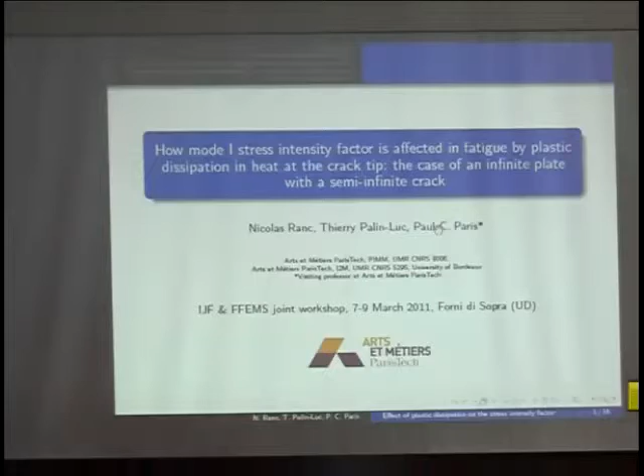The title of the talk is how the mode 1 stress intensity factor is affected by plastic dissipation in heat at the crack tip. We will focus on one very theoretical case of an infinite plate with a semi-infinite crack. I will explain why, but shortly speaking, it's because it's the only case where we can obtain an analytical solution of the problem. This is work done with my colleagues Nicolas Ranc and Paul Paris, who was invited by my university last year and the year before.

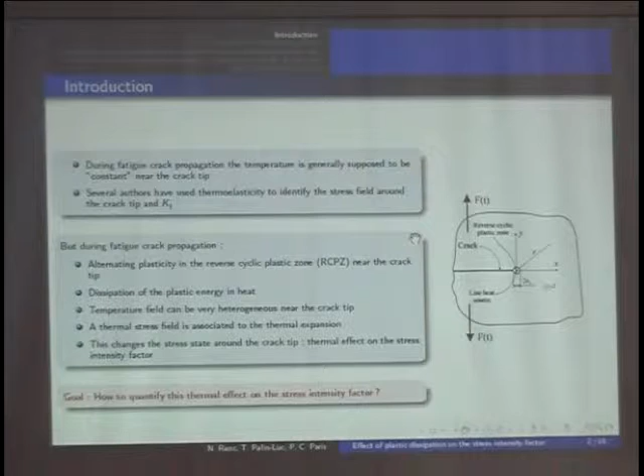So what is the motivation of the work? Many people use thermoelasticity to estimate the stress field around the crack and to compute the stress intensity factor, often considering the temperature around the crack tip constant. But in fact, if there is crack propagation, during that propagation there is alternating plasticity in the reverse cyclic plastic zone, meaning that a significant part of this plasticity, the strain energy, is dissipated as heat around the crack tip.

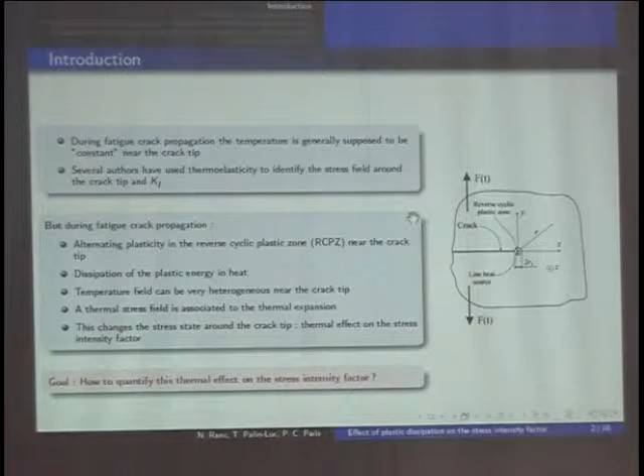Due to this dissipation in heat, the temperature field around the crack tip is heterogeneous, and consequently there is a thermal stress field associated with thermal expansion, because around the crack tip the material tries to expand but cannot, due to the rest of the material being elastic. So how to quantify this effect on the temperature and on the stress intensity factor is the main goal of the presentation, in the theoretical case of a large plate with a large crack.

So the plan of my presentation after this brief introduction: first we will see the thermomechanical problem and several assumptions to solve it. Then we will see the resolution of the thermal problem - the first important point is to be able to compute the temperature field around the crack tip. The second important point is to solve the mechanical problem, to compute the stress field and then the stress intensity factor due to thermal stresses. Finally, we will see the conclusion and interesting prospects for future work.

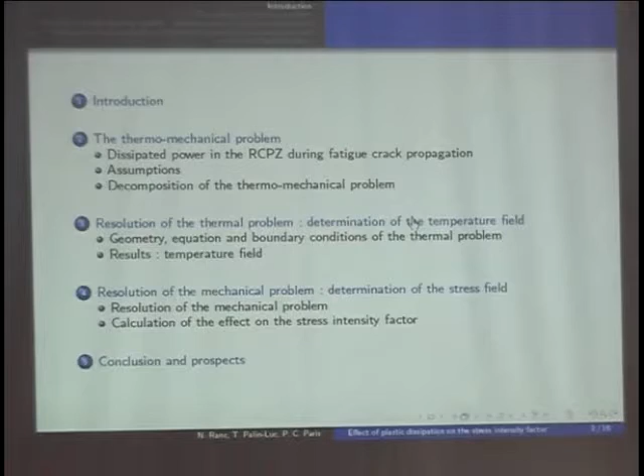In literature, many people have focused on the dissipation in heat of plasticity for very fast cracks, for instance during impact loading or quasi-static loading, but only a few papers, according to me and my colleagues, are focused on what happens under cyclic loading.

For instance, my colleague Nicolas Ranc proposed in 2008, based on experiments, that the dissipated power per unit length of the crack front is proportional to the radius of the reverse cyclic plastic zone to the power 2, and also proportional to the loading frequency. I will come back to this at the end in the prospects, but the proportionality with the loading frequency is interesting for future work, I think.

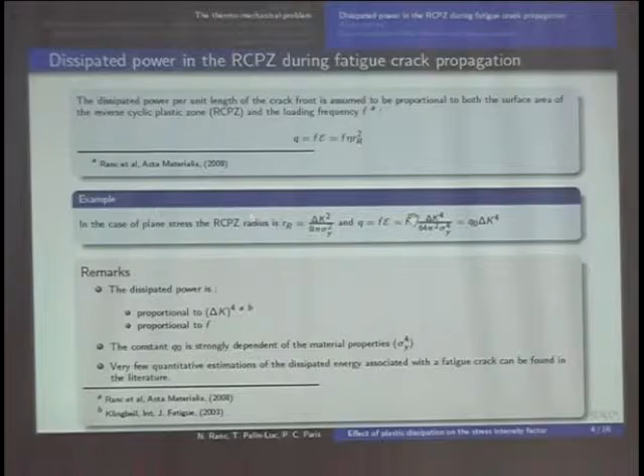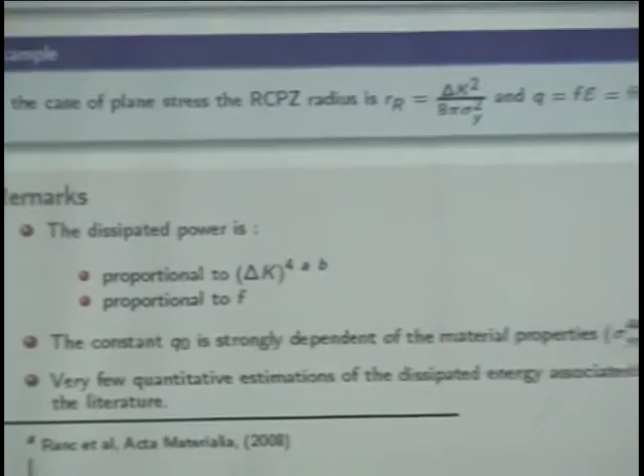So, for instance, if you are in plane stress - but it's the same in plane strain conditions - you can compute the reverse cyclic plastic zone with a very simple approximation, and in this case you can see that the heat source, or the flux of temperature, is proportional to delta K to the power 4. It's important to note these two proportionalities, and also that Q0, this factor, is strongly dependent on material properties, because the yield stress appears here with the power 4.

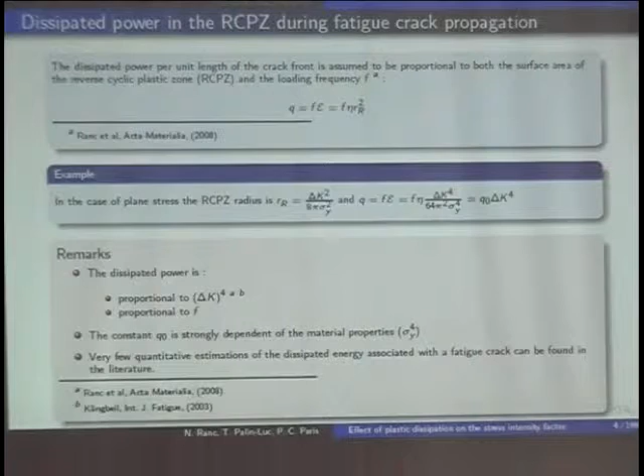But in literature, there are only a few quantitative estimations of this dissipated energy - we will come back to this at the end of the presentation. Anyway, it's clear that there is dissipated energy, and now we will focus on how to estimate its effect on the stress field and on the stress intensity factor.

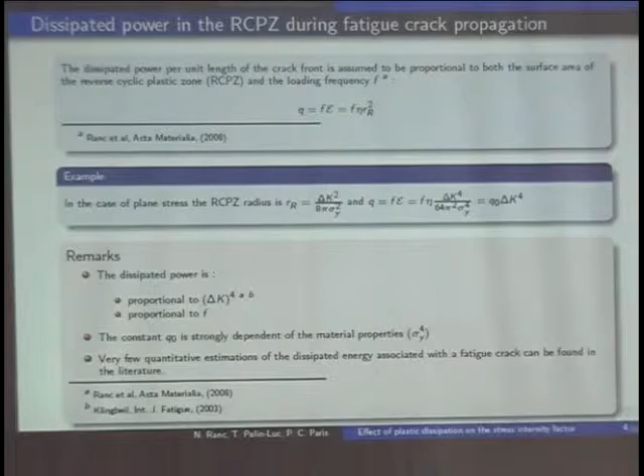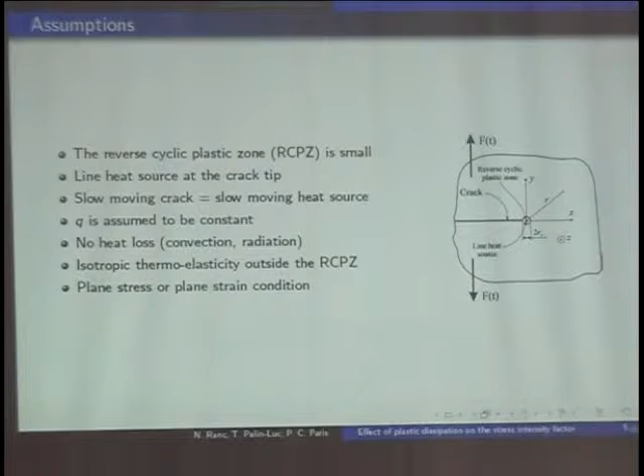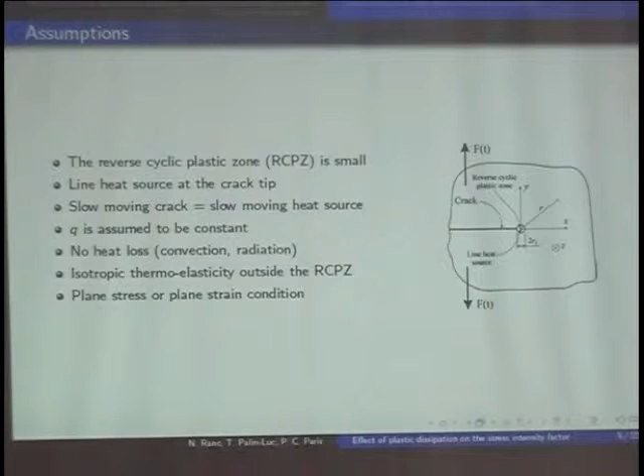So the assumption of the presentation, to be able to solve the problem analytically, is the following: we consider that the reverse cyclic plastic zone is small compared to the size of the specimen, and in this case the reverse cyclic plastic zone can be modeled by a line heat source - a local heat source. In this case, an analytical solution exists, and we will see it's not very difficult.

And we consider that the crack is moving very slowly, because in the case of the thermomechanical problem, there is a competition between the speed of the crack and the speed of the heat conduction.

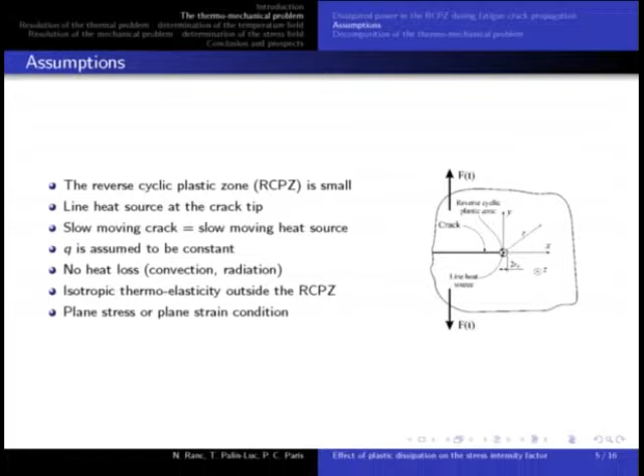So the problem we have to solve with the cyclic loading for the crack propagation is the following. There is a mechanical problem, the usual problem that all of you know, plus the thermal problem with the heat source at the crack tip, which creates a thermal stress field and which will affect the stress intensity factor. I will call in the presentation K-temp, the temperature effect on the stress intensity factor.

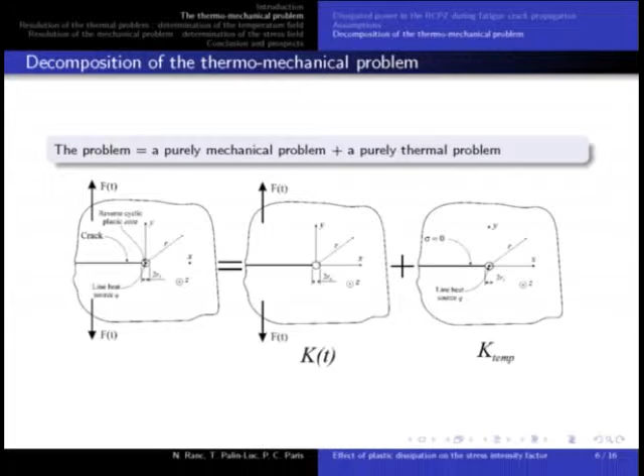What are the boundary conditions? And the first important point, the assumption in order to be able to compute the temperature variation field around the crack tip: from a thermal point of view, the problem is axisymmetric, and the heat source is considered as static or motionless. And we will see that in the equation, the temperature field and the stress intensity factor due to temperature is proportional to the heat source.

So we have solved all the computation with a unit heat flux. But we will see the effect at the end if we consider another value. We consider the transient regime. It means that when the crack starts to propagate, what happens and how the heating appears.

And for the temperature effect, in first approximation, we consider that the crack does not affect the temperature field. This is maybe a strong approximation, but for future work in finite element analysis, we can take into account the effect of the crack on the temperature field.

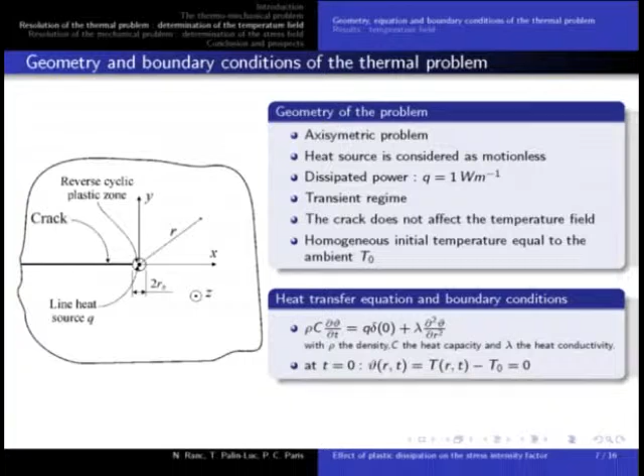So if we write the heat transfer equation, we have this equation with the local heat source, with the Dirac function here. And we are looking for the temperature variation field with a first homogeneous temperature T0.

What are the results? The results are the following. On the left, you have here, from the crack tip, so the crack is here, the effect of the temperature - I'm sorry for the scale, which is in small letters. Here you have 0.03 degrees Kelvin versus the radius. So here there is the specimen.

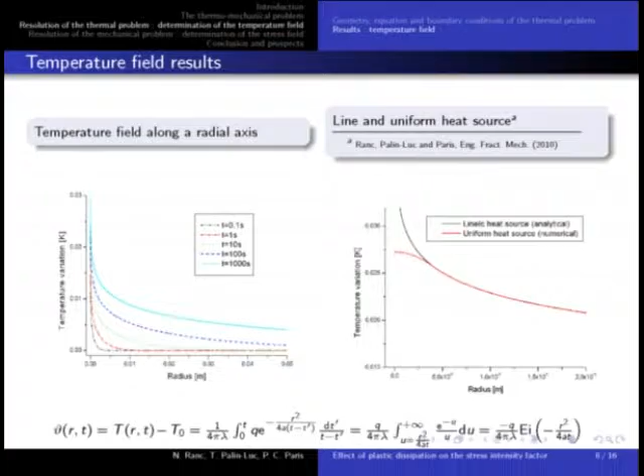So the analytical solution of the temperature is the following. In fact, with the exponential integral, which is this integral, you can note that the temperature variation field is proportional to Q. That's why we have plotted the figure with a unit flux, here 1, and with lambda, which is the conductivity, and A is the diffusivity.

So what is important to see? We see that with the line heat source in our model, there is a singularity in temperature, like in stress, because of the local or punctual heat source.

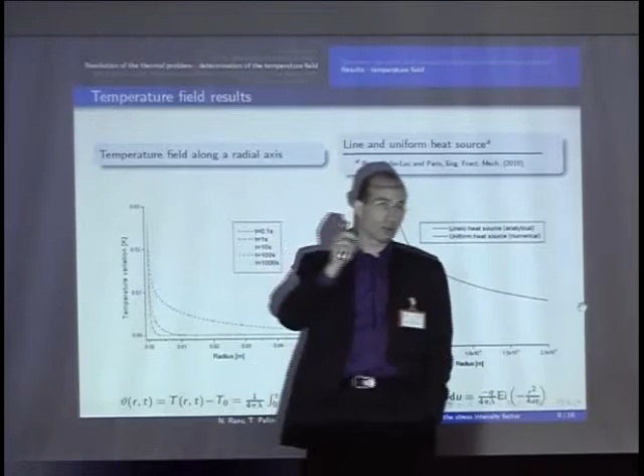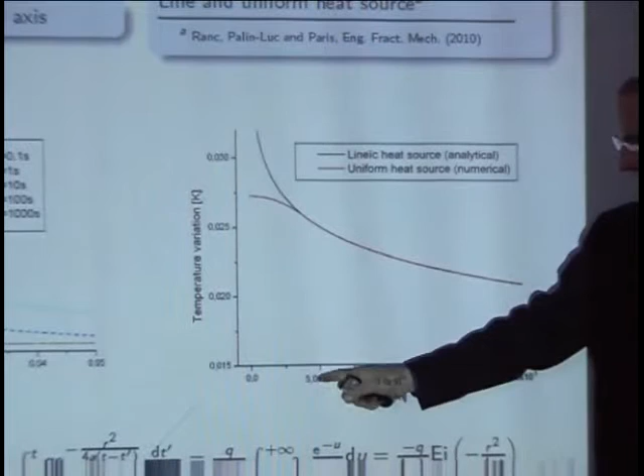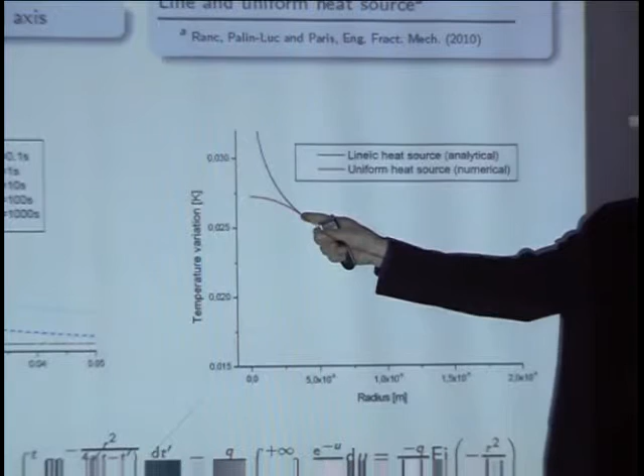But in fact, we have shown last year with my colleagues that if we do not model with a local heat source, but with a uniform heat source in the reverse cyclic plastic zone, numerically we obtain the red curve here. The scale here is 5 micrometers. This example is for a very small reverse cyclic plastic zone with a radius of 4 micrometers. In this case, we can see that outside the reverse cyclic plastic zone, there is a very good correlation between the analytical solution of the line heat source and the uniform heat source with the numerical solution.

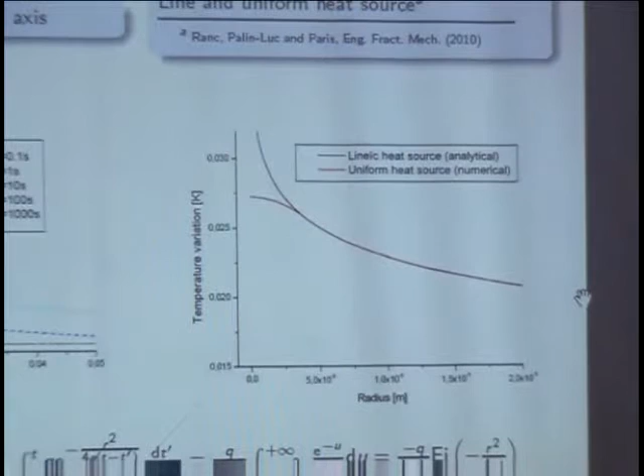So for the rest of the presentation, we can consider that outside the reverse plastic zone, the line heat source assumption is good.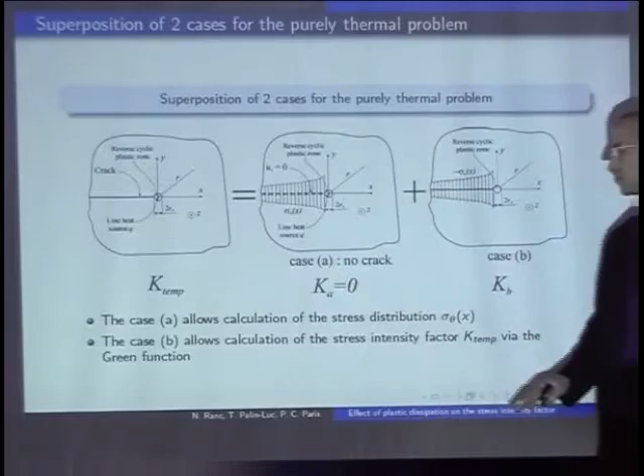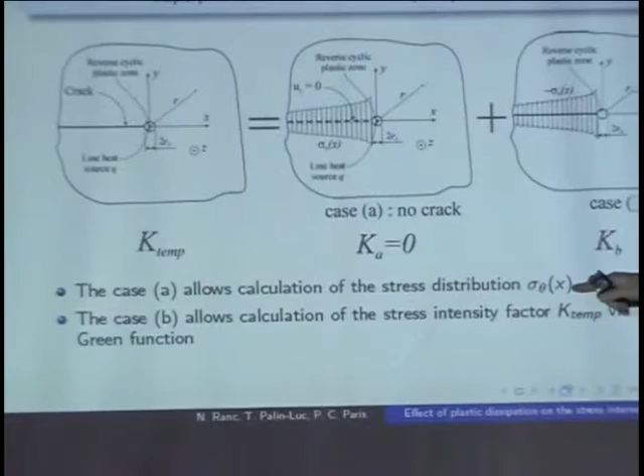Now, if we want to solve the mechanical problem due to temperature, so I mean to compute the effect of this temperature field on the stress, we have separated the problem into two cases. The first case, where there is the distribution of stress due to temperature with no crack, and then with the Green's function, we will compute, with this stress field due to temperature, what is the effect on the stress intensity factor in the other case.

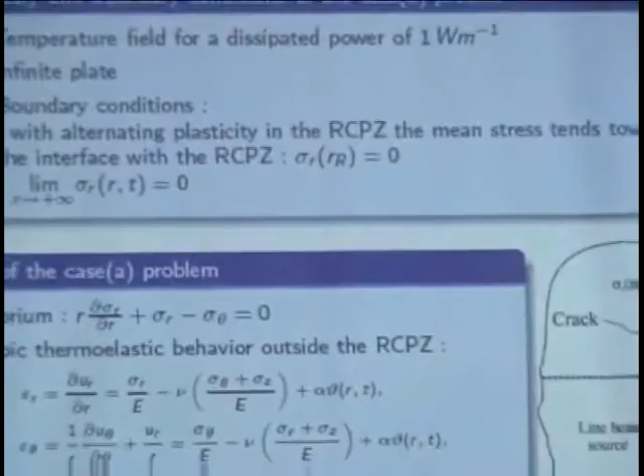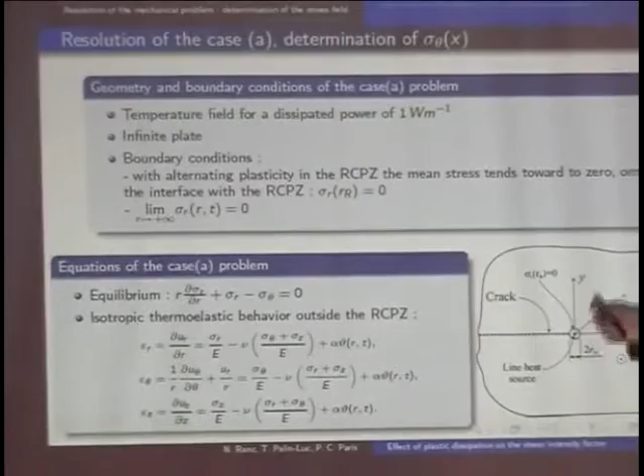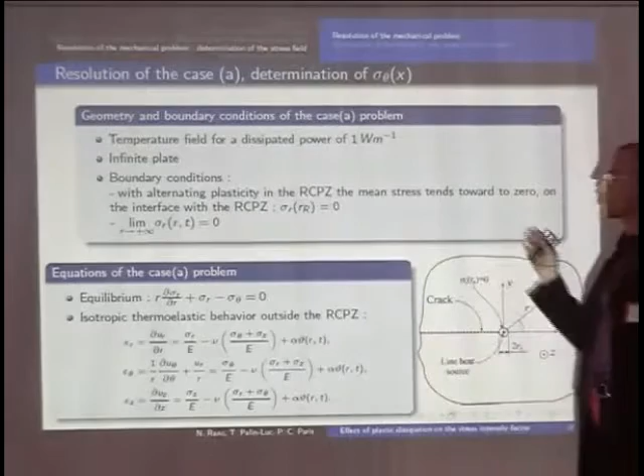So what are the assumptions to solve this, and the boundary conditions? The boundary condition is a key point in this problem. As previously, everything is computed for a unit flux. We consider an infinite plate with the following boundary conditions: far from the crack, all the stresses are equal to 0 - it's the assumption of infinite plate. And inside the reverse plastic zone, due to the reverse cyclic plasticity, the mean stress goes to 0. So we consider that at the frontier between the reverse cyclic plastic zone and the elastic field of the material, the mean stress is equal to 0. So it's the other important boundary condition.

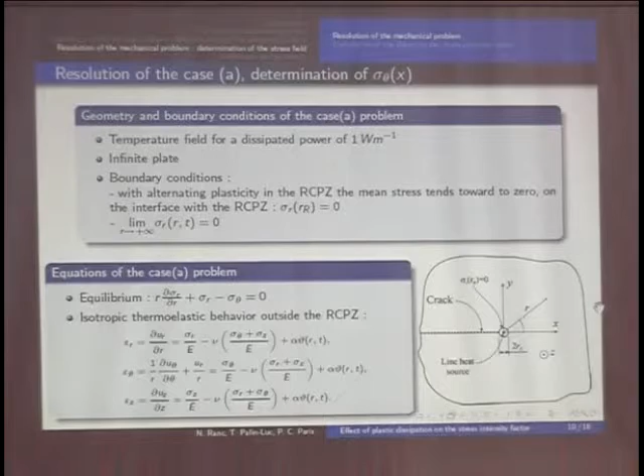And then we write the equilibrium equation. In this case, it's an axisymmetric problem, so there is only this scalar equation, and outside the reverse cyclic plastic zone, thermoelasticity with isotropic behavior. And we obtain the following results.

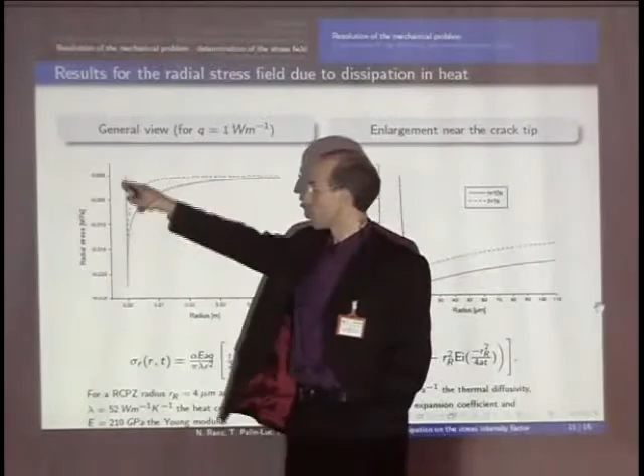The first is the radial stress. In fact, it's not important for the effect on the stress intensity factor because the radial stress does not open the crack. The next slide will be about sigma theta, the circumferential stress. But this equation, this result, is interesting. First, you can see here the analytical results where the stress is proportional to Q, so to the heat source. All this curve is computed for a small radius of the reverse cyclic plastic zone, 4 micrometers, a typical value for steels. We can see that the radial stress close to the crack tip is here at 0.

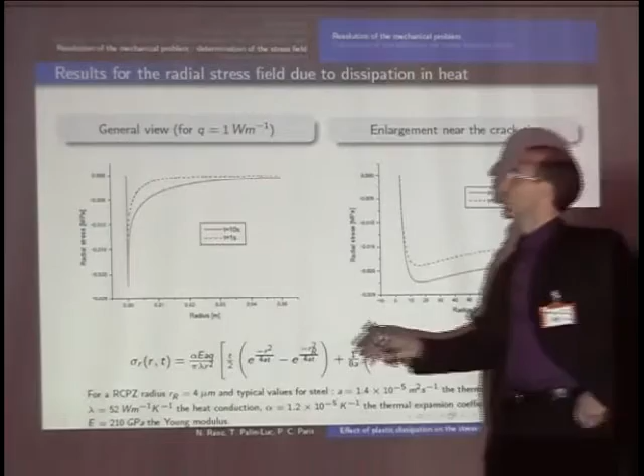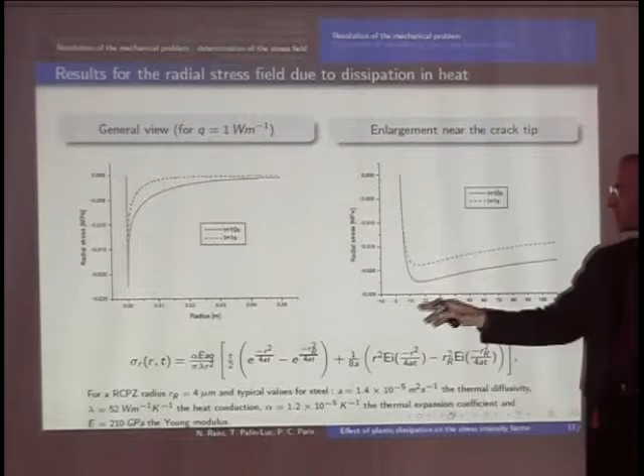The radial stress is negative because of the heating which tries to expand the material. You can see also that there is an evolution of the radial stress with time because of heat conduction. If we zoom on this peak - the scale here was meters, now we are in micrometers - you can see that there is a peak which is moving a little bit with time. The values are very small, always because we have a unit flux. Here we have minus 0.02 megapascal.

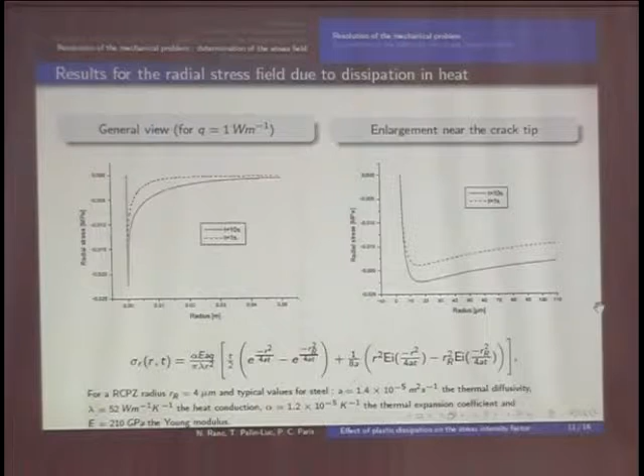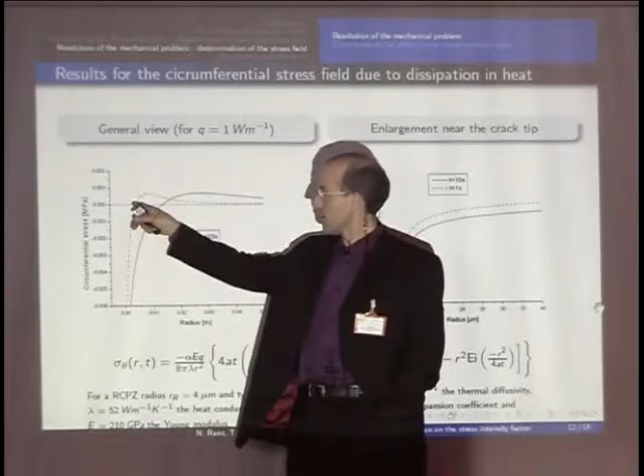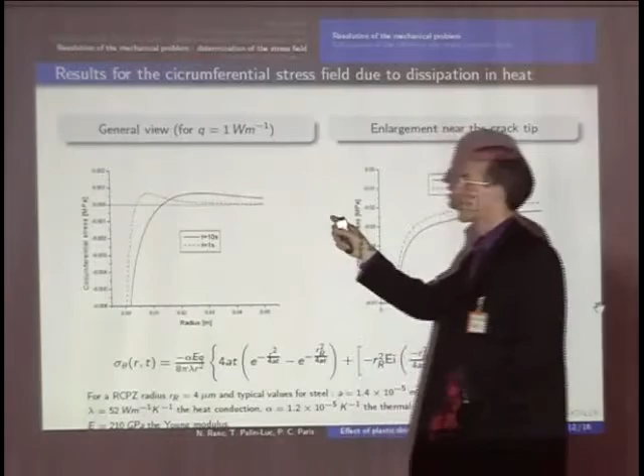Now, if we look at the circumferential stress, we can see approximately the same analytical equation with some difference in the sign, but these differences are important due to the following consequence. The crack tip is always here. You can see that the circumferential stress is negative around the crack tip, and after there is a small peak in tension for equilibrium, and then it goes to 0 because of the very large scale of the material in this case. If we focus in this area near the crack tip, we see that there is a finite value around 4 micrometers, because 4 micrometers is the radius of the reverse cyclic plastic zone, which is here. So in this case, we have this stress field.

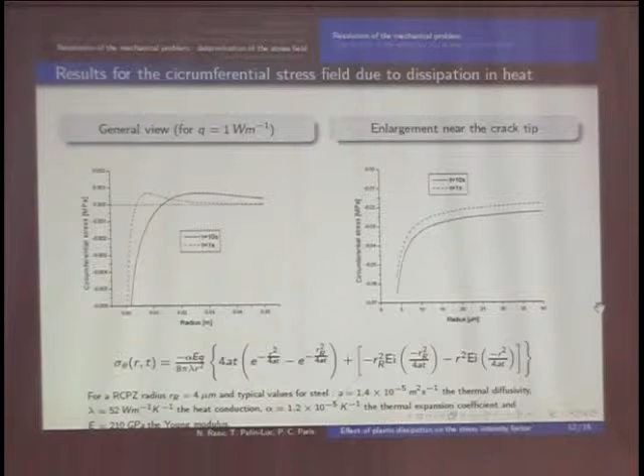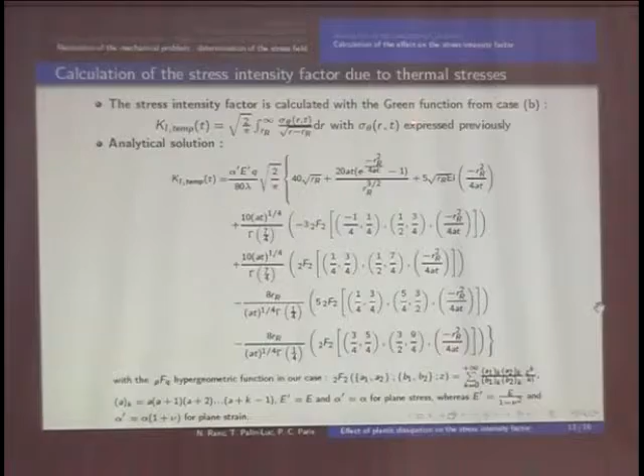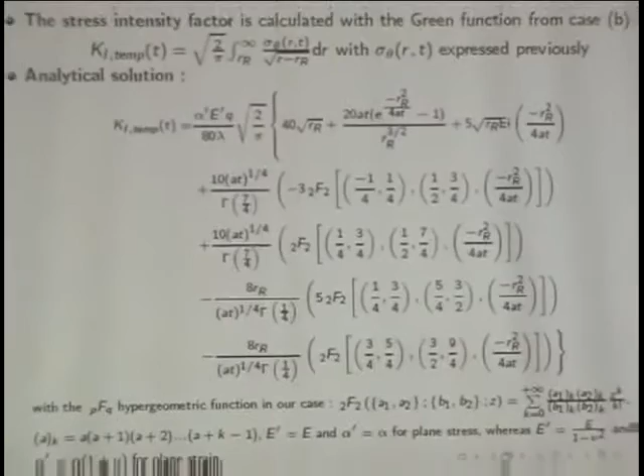Now, with this stress field, we can include it in the stress intensity factor calculation and see what happens. So the stress intensity factor has been calculated with the Green's function in the case of the semi-infinite crack in an infinite plate, with the temperature, the thermal stresses due to the heat source. It's interesting in this case that we obtain an analytical solution. Of course, numerically, with finite element analysis, we can solve it, but here it's interesting to see the tendency and what are the important parameters.

So in this analytical solution, where the f function is a hypergeometric function, we can see that Q here is a key parameter, and lambda also is an important parameter. This equation is also interesting because it has been solved in two cases, in plane stress and in plane strain, which is interesting for estimating what happens in the two cases.

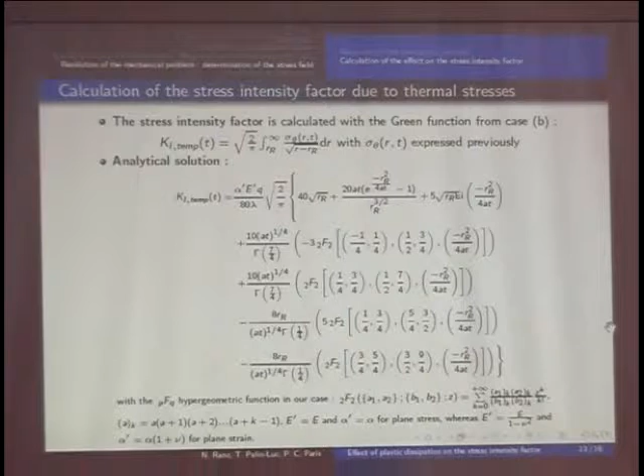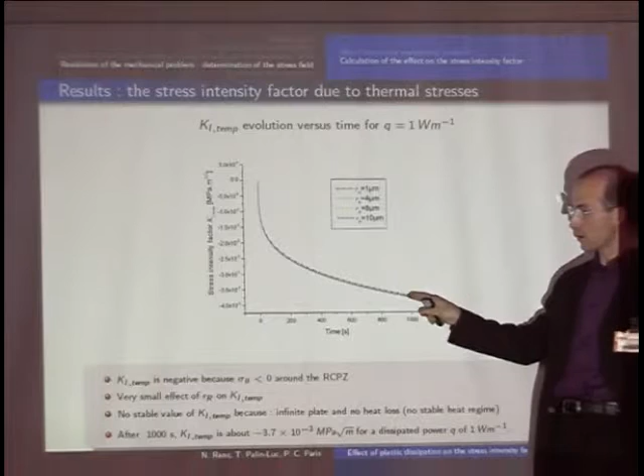If we plot this versus time, we can see the following curve. The stress intensity factor due to temperature effect is negative. It's negative because in fact there are compressive residual thermal stresses. It's interesting also to note that if we compare different sizes of the reverse cyclic plastic zone, one order of magnitude between the two curves, the difference is very, very small - it can be negligible. And in our case, there is no stable value versus time.

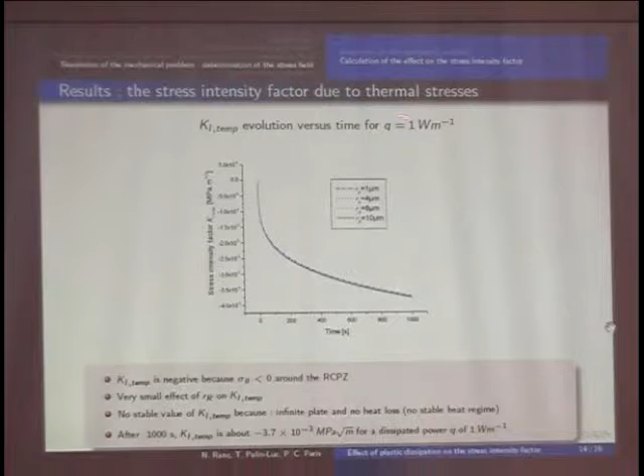It's only an artifact about our problem, because in fact we have no heat loss, no convection, no radiation loss, and we consider an infinite plate. So in this case, there is no stable heat equilibrium. Of course, with finite element analysis, it's possible to solve a finite specimen and to include the heat loss. Here, in the case of a unit heat source, we can see that after 1000 seconds, the effect on the stress intensity factor is around -4 x 10^-3 megapascals per root meter.

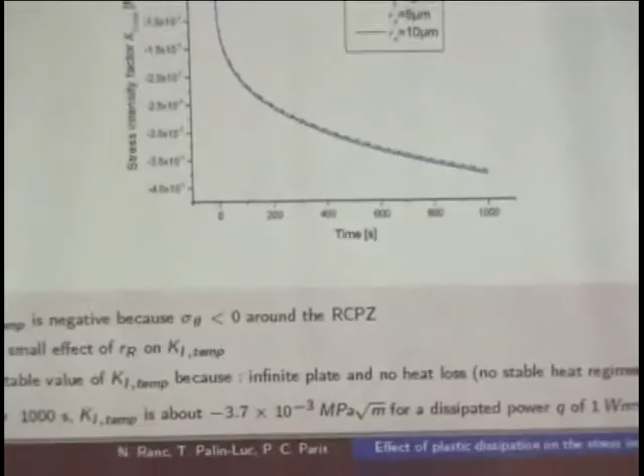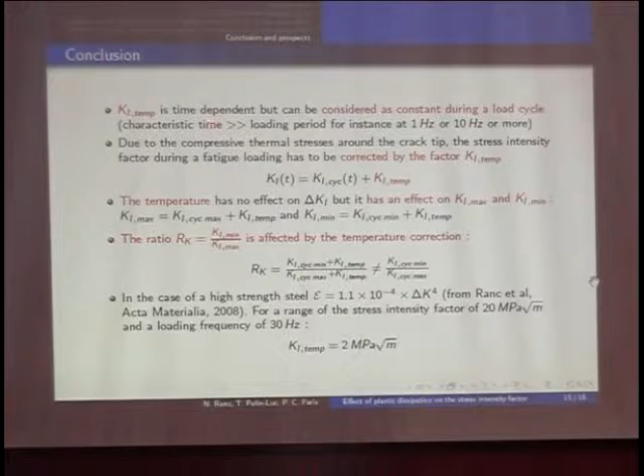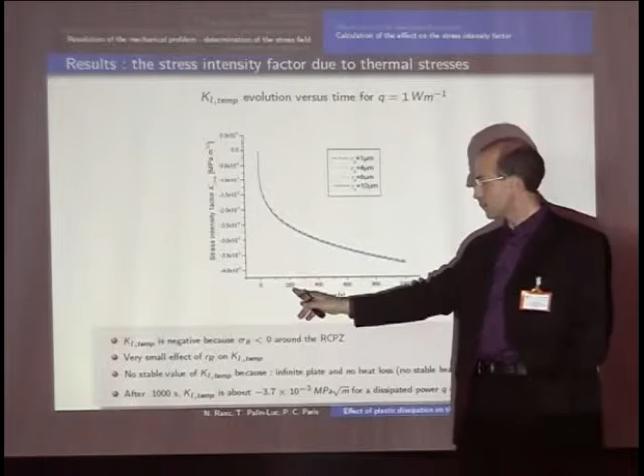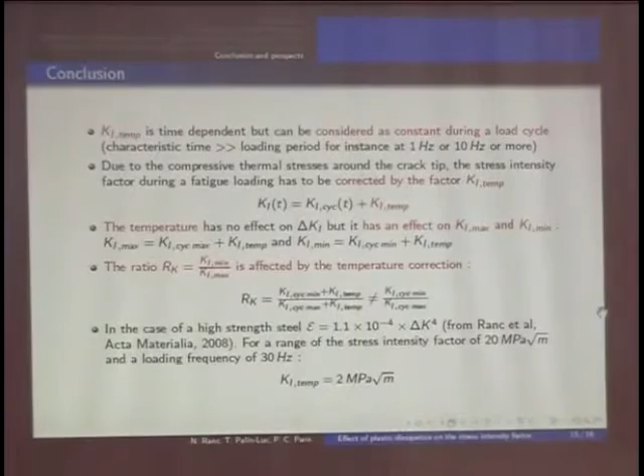In conclusion, we can say that the temperature effect on the stress intensity factor in mode 1 is time dependent. But if you come back to the curve, after the beginning of the cyclic loading, we can see that the characteristic time here is 200 to 400 seconds. If you compare to a cyclic loading at 1 Hz or 10 Hz, we can consider that during one cycle the effect of temperature is negligible, because the characteristic time of heat conduction is very big compared to the loading period.

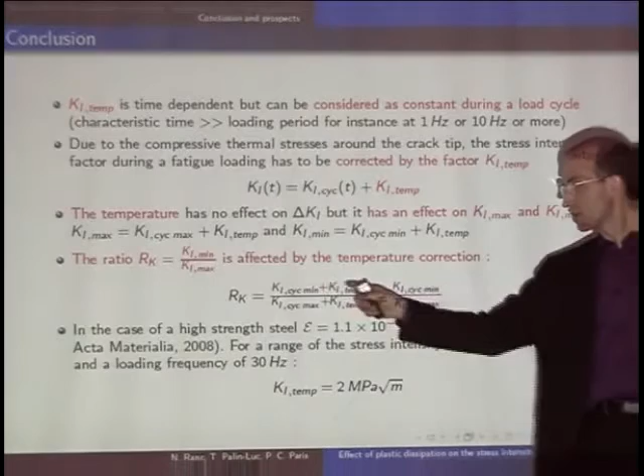The other point is that due to the compressive thermal stresses, the stress intensity factor under cyclic loading has to be corrected by a factor, and consequently the value of Kmax and Kmin, the minimum and maximum value over one cycle, is affected. There is a change. In fact, if we consider the heat effect at the crack tip, the local R ratio is not equal to the common value. It has to be corrected by this K1 factor because of the additivity here. It's different from the K1 due to cyclic loading usually computed.

So the key point is what is the effect quantitatively, because now we have solved the problem analytically. If we consider a high-strength steel, Nicolas Ranc has shown that the energy dissipated per cycle - per loading cycle - is around 10 to the power -4 multiplied by delta K to the power 4. This is for a high-strength steel. If you include this value, for instance when the stress intensity factor range is 20 megapascal square root meter at 30 Hz - don't forget that all the results are proportional to the loading frequency - in this case the effect on the stress intensity factor due to temperature is around 2 megapascal square root meter, approximately a factor of 10.

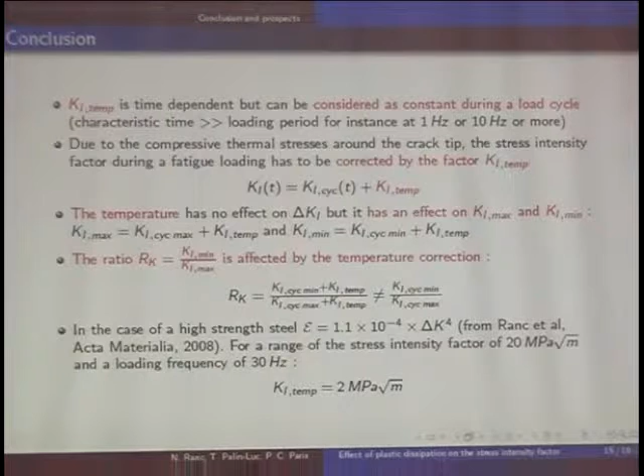Of course, here we can see that this is maybe not negligible, and the key parameter of all this is, of course, the heat source. And this heat source cannot be computed up to now, we have to measure it. So it means that to quantitatively estimate if this is important or not, we have to carry out infrared measurement and calorimetric measurement to precisely quantify Q. Now we are doing these experiments.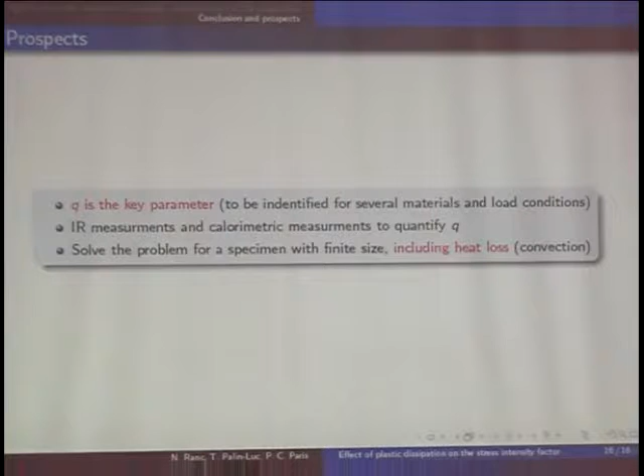We have started 2 months ago, approximately. For instance, for a 2024 aluminium alloy specimen at 10 Hz, this factor is around 25 watts per meter. So you can assess approximately what the effect is, but it's very dependent on the size of the specimen, because it's very dependent on the thermal boundary conditions.

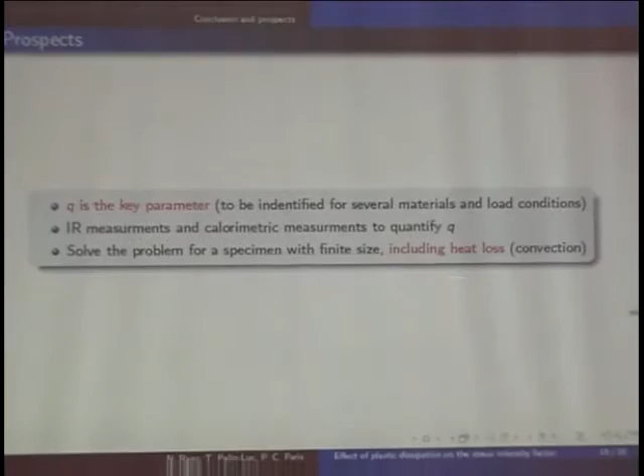And we also have to solve the problem in the case of a finite size, including all the heat losses, which are very important. But I think that considering the thermal effect on K is important if we want, for instance, to revisit many experimental data - for instance about the frequency effect, maybe about what happens in air versus in vacuum, because when you are in vacuum there is no convection loss - and maybe other interesting things like that. Thank you for your attention.

So if I understood well, if you go with your calculations to 3000 Hz as a frequency, then you should have 200 MPa root meter shielding effect due to temperature. There is a very big problem, according to me, Nicolas Ranc and Paul Paris, for gigacycle fatigue test at ultrasonic frequency, according to this model.

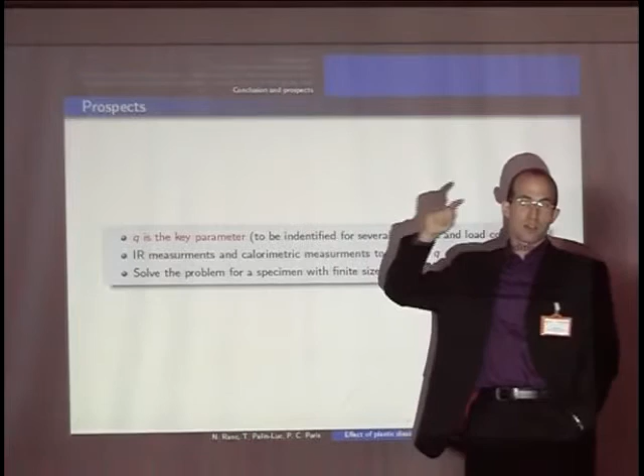But I think an important point also, as it's written here, is Q. I don't know what the Q value is, for instance, when you are at very high strain rate, because I guess that the mechanical cyclic behavior of the material - for instance if there is viscoplasticity - will affect the value of Q. Usually we estimate this value by experiments with classic frequency between 1 and 100 Hz, but I don't know what happens if you multiply the frequency by 100. But it's very important.

I'm somewhat surprised about the large value, because I have tried to use this effect to measure the plastic work - yes - even at the threshold value. And we have performed experiments at 20 kilohertz in order to measure the plastic work near the threshold. That would be the idea, to see what happens.

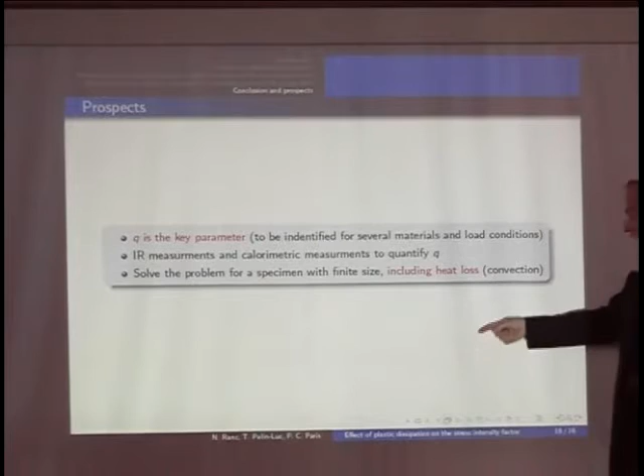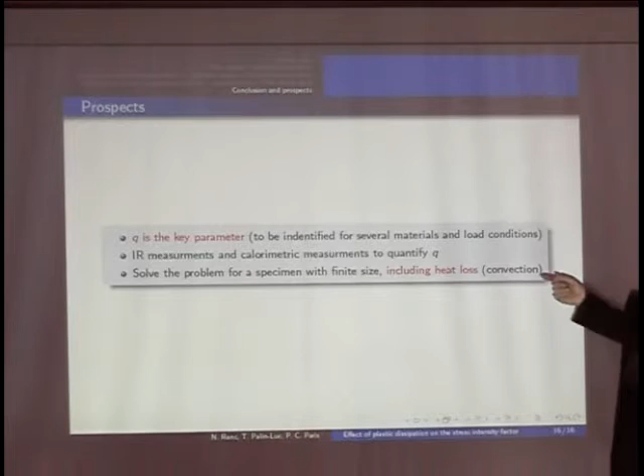The first thing is that it's clear we have no board here, but if you look at temperature versus time, it's a curve with a sort of thermoelastic effect at high loading frequency, and there is a monotonous constant increase. Okay, so in my talk, we are only talking about the monotonic increase.

According to the few experiments we carried out, we tested an aluminium alloy 2024, a C40 steel, and a titanium alloy. This monotonic increasing is very dependent on the material. If you look at the aluminium alloy we tested, the increase of temperature is very, very small. Yeah, because of its conductivity.

Yes, if you look at the steel, there is significant heating. People carrying out ultrasonic fatigue tests know that for ductile steel, the heating is important. For aluminium alloy, the self-heating is very small. But of course, maybe many things are involved in this parameter. Up to now, we don't know how to estimate its value without experiments.

And about the experiments, you say it's difficult to measure the strain energy, the plastic strain energy. I think we have to discuss this, because according to me, you do not measure the plastic strain energy. What we can measure with infrared measurement is only the temperature, and we can compute. Yes, you can compute, but you need a model to estimate the plastic strain energy.

And I think in this model... absolutely correct. But in my model here, there is only the physical parameter, which is Q. It's clear that in this model, I do not say that Q is related to the plastic energy or to another phenomenon. I think afterward we have to go deeper into the constitutive behavior of the material. Okay, see.

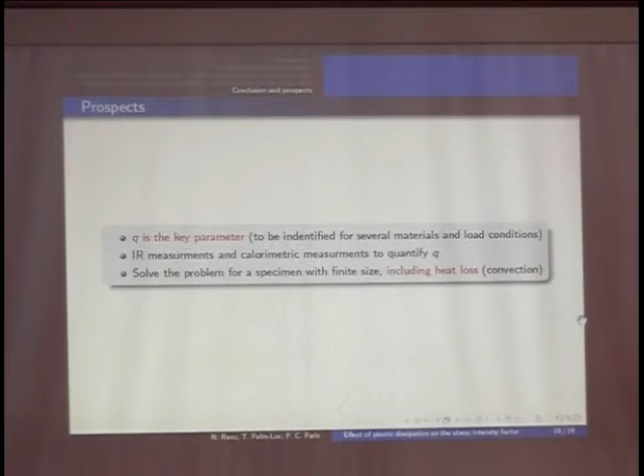And that's really why I gave up trying to measure the work. It was really my idea to look at what really happens at the threshold, and it was not possible. For me, maybe - there are better experimentalists.

Of course, here also in the model, which is simple in fact, the important parameter is delta K, but in reality, maybe it's delta K effective. Yes, but in first approximation, to carry out the model, it's enough to consider delta K.

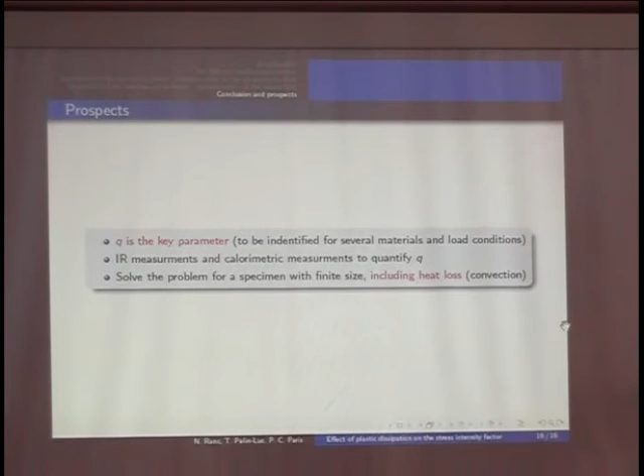But I think we have to go deeper in experiments with, I would say, precise measurement of delta K and delta K effective to be close to reality. We are only starting these experiments for 6 months, so it's the beginning.